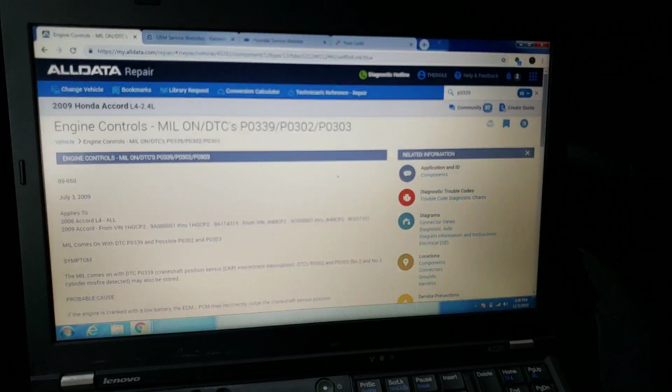Okay, so just got called out here to this one as well. 2009 Honda Accord with the 2.4. Had a code in there for P0339. So, quickly I came over here just to see what the 339 was. I knew it had something to do with the crank sensor circuit.

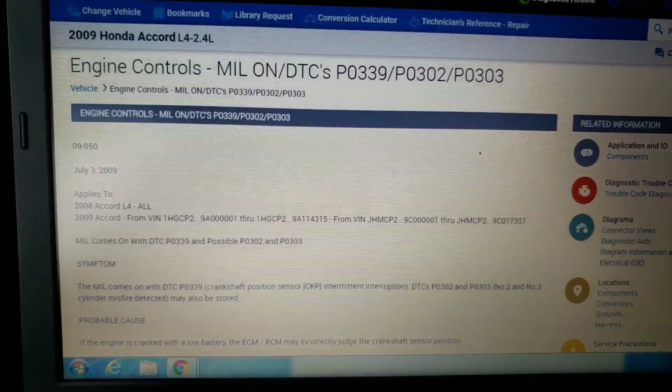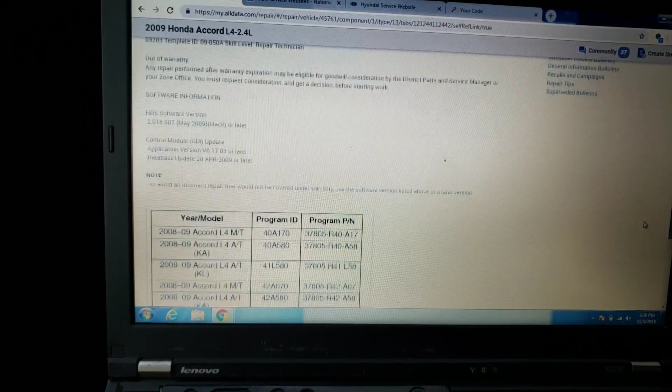But when I pulled up service info, the very first thing I looked for in there was a technical service bulletin. And as I came across that technical service bulletin, it basically says here that if it's within this VIN to this VIN, and it sets a 339 and a possible misfire code as well, that there is a programming update, which I'll scroll down slow for you guys. You guys can go over it again later on. But essentially, there's a programming update there to do the software update, and then afterwards do a crank relearn.

So I'm going to show you guys what I had to do. Now, first thing I did, of course, is I went outside there and I verified, do we actually have a good crank signal? I know that they had replaced the crank sensor. They told me OEM, but I just wanted to be 100% sure. I've got the battery maintainer out there already going, and it's pouring rain out here, so I'm going to try to sit in here and do this for you.

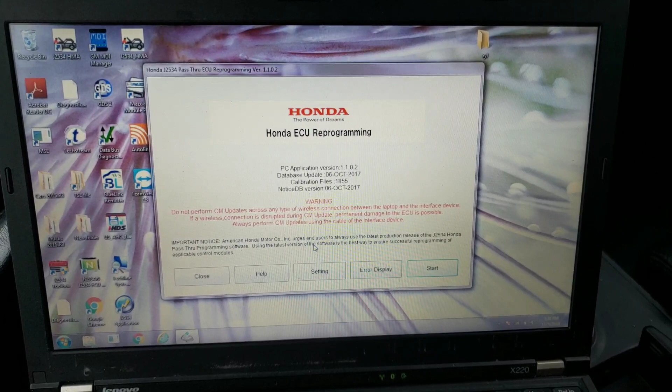From the Honda website, when you download all your information there, they have a J2534 app. I'm sure somebody else will do a video on how to get all this. But it is available to you, and Honda does not charge for their programming updates. So this is what you'll go into here. You're going to see a little menu that comes up over here that says J2534 rewrite. There it is right there. That'll be your little icon that you'll have.

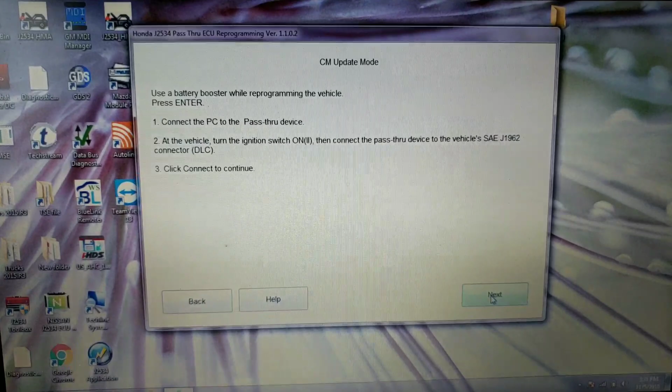And let me put it back over here so we can actually watch it. And we're going to come in here and hit start. And it's going to sit there and look at our calibration files. Hit next. Use a battery booster. I wouldn't call it a battery booster while reprogramming the vehicle, but that's what we'll do. We'll hit the next button, and it goes into CM update. I think it tells you whether or not it's valid for an update. PGMFI.

I'm sure you guys can hear that rain just coming down non-stop out here. Come on now.

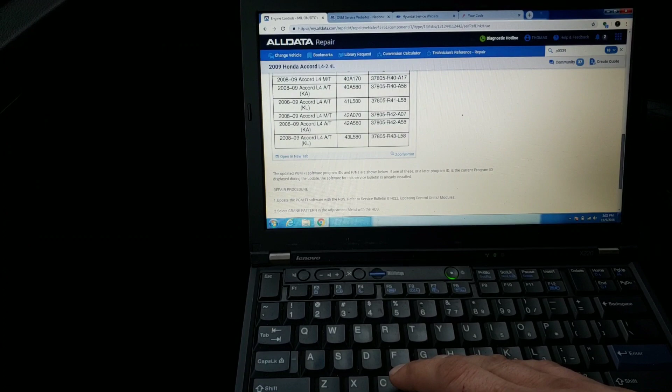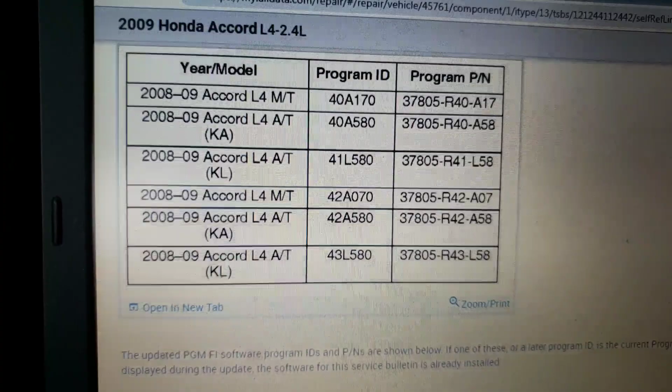Are we actually done? I think we actually are done. We'll hit the select button. Current program file is 43L570. And if we come over here and we look, let's see. These are the updated numbers that'll be on here. So my guess is that since we have 43L570, we're going to end up at 43L580. That's my guess. Let's see.

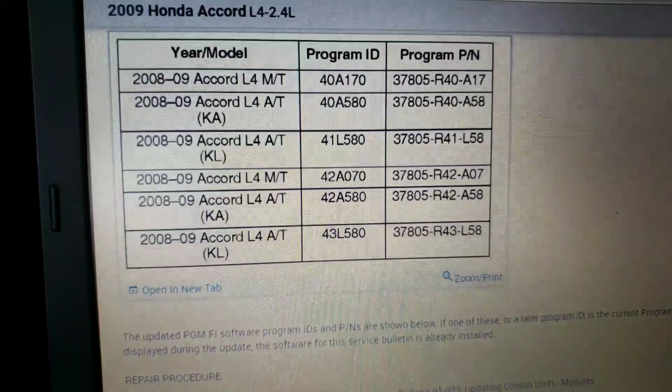Actually, we can tell, I think. So the program part number, it looks like even that changed over there. The program part number, 37805R43L59. So as long as it requires an update, and I really got to make this thing sit still. We hit the enter button. Press enter button to start the control module update, which we will, and it's going to do that update for us.

After that's done, I'll end up hooking up probably my Launch, and then I'll start to do the crank relearn. I don't think I'm going to keep you guys with me for that, or if I do, it'll be a second part. But that's just a simple procedure. Follow the instructions on the scan tool. Don't try to do it manually, it will not work. So we'll let it go through. The Honda ones are pretty quick. Doesn't take very long.

I did have a request for some more singing on video. I think I'm going to pass that up though, just for the sake of keeping a few subscribers here and there. Not that I don't appreciate the compliment on my Wheels on the Bus song, but I think that it's probably unnecessary.

So PGM-FI completed. Let me turn the ignition switch off, and turn it back on within 60 seconds. So the previous programming ID was 43L570. The updated program ID is 43L590.

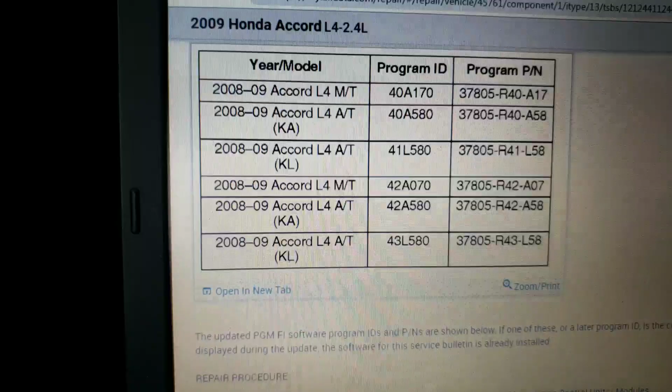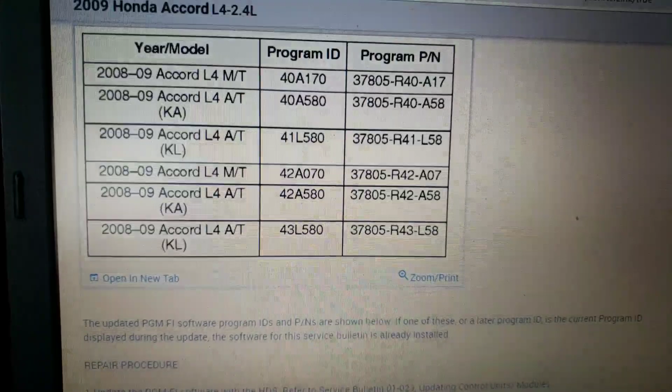So even this bulletin has been superseded, which kind of makes sense though, because again, that program part number was 59 here and 58 there. So that's what it is. It's that bottom one there, that KL. And so now that programming update is done.

So anyhow, that's all I wanted you guys to see. Just a quick, easy update on it. Hit system search, I didn't mean to. Let me cancel on that and go back out of that. So very simple. It's a matter of just going in there and actually reading through your service information.

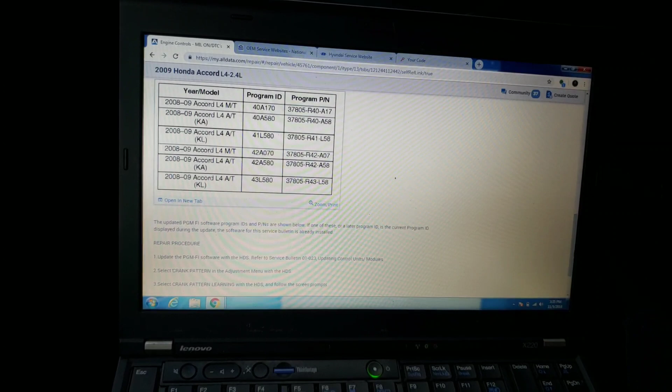And if you got a code and something like that with the crank sensor, you know, this car probably did not need one, but they replaced it anyway just to be on the safe side, which I guess is okay. And at least they did buy a Honda one. I'm not upset about that. So if you do happen to come across something and it doesn't seem to make sense to you, make sure you always go in there and check on your TSBs.

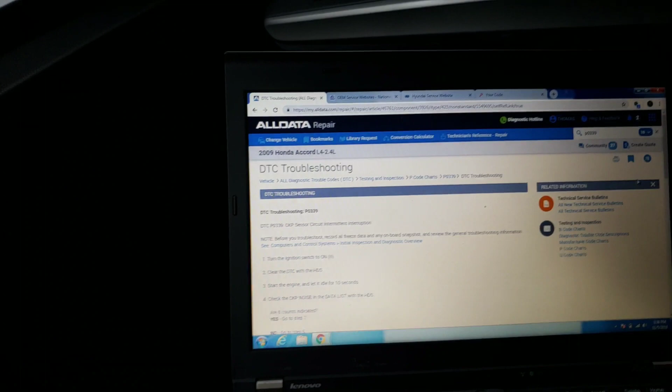If you just went in there and looked up the P0339, like let me go in here and do this, and we were just going to go into regular DTC troubleshooting, there's no mention in here. You would sit there and go through and look for noise and everything else. And is the crank noise okay? Yes. Well, it must be an intermittent failure. The system's okay at this time. Everything there is going to say intermittent, must be okay at this time. It's not okay. There's more to it than just that.

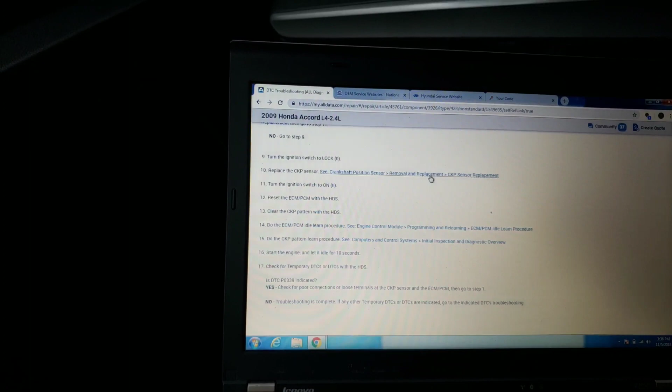This is the idle learn procedure. Let's see if we can go in here and find the procedure for you guys so we can see the crank relearn. Oops, didn't mean to do that. So do the crank pattern relearn procedure. Go to this one, initial inspection and diagnostic. And it's got to be in here somewhere. Come on now. We know you're here. There it is, right there. So that's the crank relearn procedure.

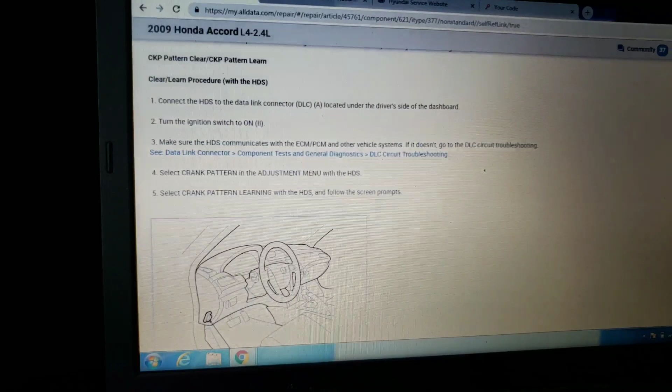If I choose to do it on video, I'm not really sure yet. With this rain, I think I just want to keep on moving along. But this is how you would do it. And then learn procedure without the HDS. Start the engine, hold the engine speed at 3,000 without load. I got to tell you guys, I've actually tried this before, not successfully.

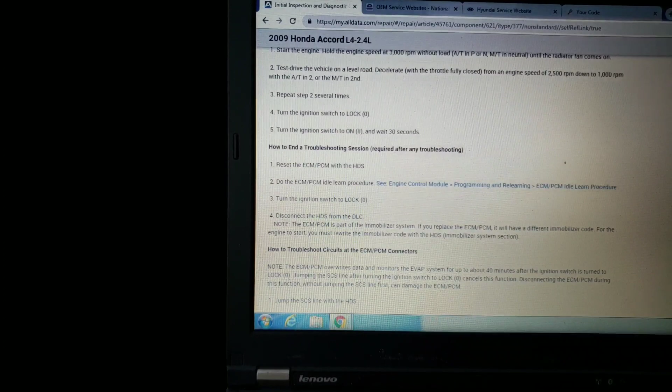Test drive the vehicle on a level road. Decelerate with the throttle fully closed from an engine speed of 2,500 RPM down to 1,000 RPM with the automatic trans in second gear. Out here in New York City, not so easy to do, but I'll leave that up there for you guys so you can see what that procedure was. You can always slow it down, just change the play speed, and you'll be able to see what the procedure actually is.

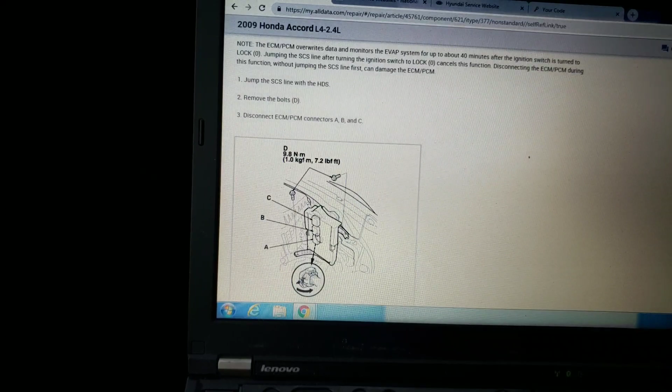In the meantime here, I'm just going to go out there, throw the Launch on this thing, get it done, get out of this rain, and keep on moving. All right, so just another quick video for you. Again, always watch your service info.